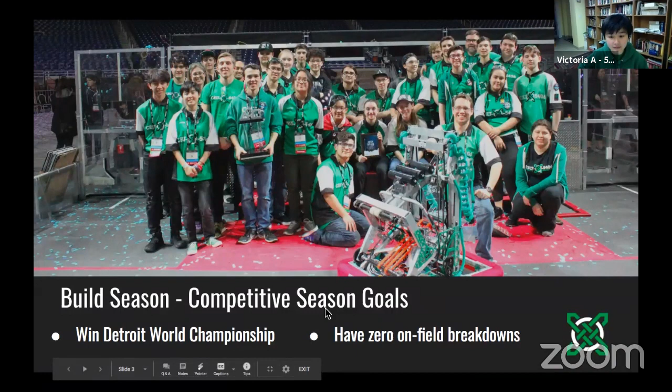Hi, I'm Emma. I'm in grade 11. I work on design and manufacturing, and I'm also the operator.

This year, our team had 2 main competition season goals. Every year, our goal is to be one step further than we did in the previous season. Last year, we actually had a goal to make it to Einstein's. Not a lot of people know this, but after Ontario District Champs, I decided that we were going to win Worlds, and nobody took me seriously until we almost made it there. Unfortunately, we didn't, but that became a goal this year. To field the most competitive robot we could, we also have a goal to have 0 on-field breakdowns. We do this by systems checks before every single match to make sure we don't miss anything and our robot is running as smoothly as possible.

Let's go on to the next slide. The workspace that we build out of is the Robodrome, which is a shared build space given to us by our board. It's outfitted with a full machine shop and a nearly full-size practice field. We worked closely with the school board to outfit the Robodrome and shape it into what it is today. We secured grant money and outfitted the machine shop with a bunch of complex machines, like a CNC mill, a router, a laser cutter, stuff like that.

Since this building is a shared board building, it serves as a workspace for the multiple FRC teams in our board. However, we invite teams from all across Ontario to come and practice with us and use our facility. All we ask of them is to bring us a team shirt, which we display on our t-shirt wall. As of now, we've collected over 20 t-shirts. That's just absolutely amazing.

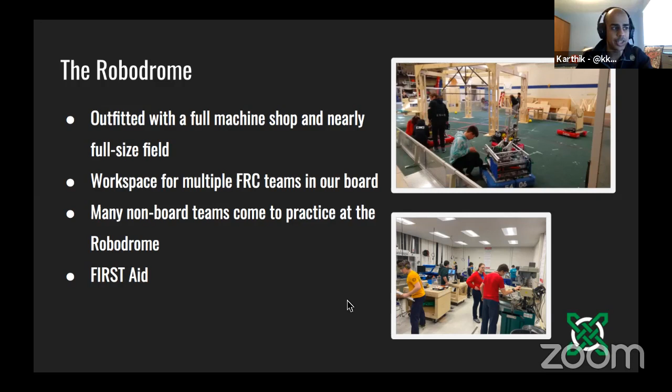Hello, I'm Andrew, also in grade 11. I do mostly mechanical and design.

Going into build season, our main strategy is to first figure out all the rules in depth about this year's game and how it can be played, in order for us to then try and figure out every single possible play or cycle the robot can perform during a match. Then we try to figure out how valuable that cycle or play could be based on how much time it takes, how many points it gets us, and how difficult it would possibly be to do.

And in order to do this, we also have a human game to make sure we understand it fully. We have 3 tiers of robots, and our teammates act as robots. We have the Brave Little Toaster, an average Ontario team, and a world championship winning team. And we figure out how they would affect their alliance scores and what kind of robots they would be and how they would play the game.

This year, we estimated an average game would be around 80 to 100 points, and we hoped by the end of the season we could contribute 150 to 200 points to our alliance.

Can we go to the next slide, please? So as a team, we do a lot of prototyping. We don't like to go from simply CAD to robot, that's it. We CAD a lot of our prototypes and we test them out, then we go back and CAD them until we finally come up with something that we feel is ready to build and will be good on the robot.

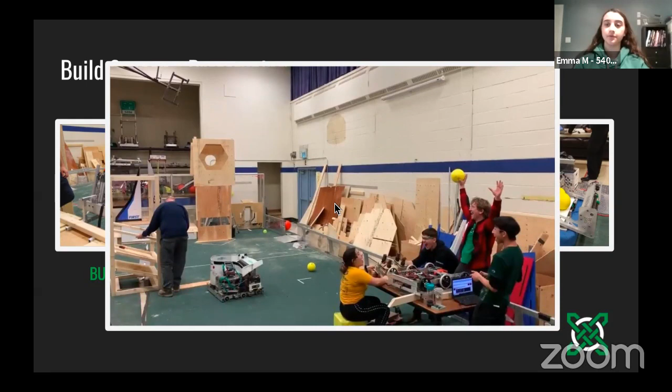So if we could play the video, this was on, I think, day 4. It was the first time we got a power cell in the inner port, and then by day 5 we were prototyping our hooded shooter.

So the last main thing, could we go one slide back, please? One of the last main things that we prototyped was mounting our shooter on top of a lifting mechanism in order for our short robot to be able to shoot over top of the control panel into the power port. After further design, we realized it was a bit too difficult for us to fully incorporate into our robot.

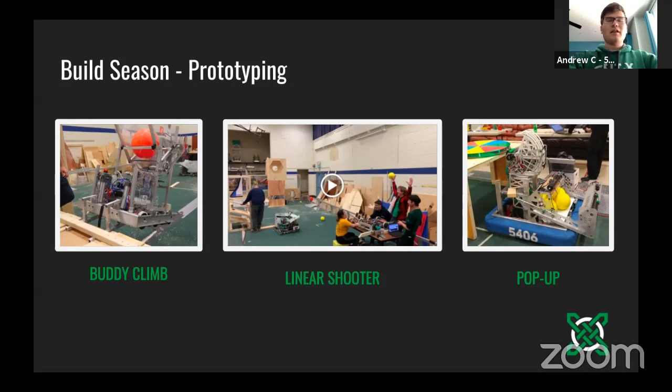It was also a bit heavy, and we did not have the weight for it. So we decided to go with a simpler option of just driving under the control panel a few more feet to get similar time shots.

So this is our reveal video for this season. We named our robot Mo because it looks like the microbe obliterator from WALL-E. And there's a little picture there. Show.

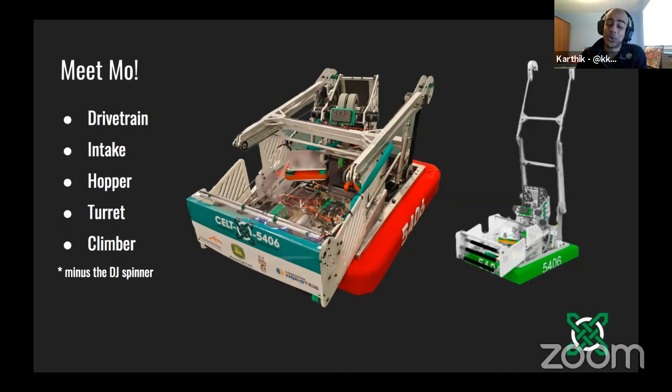Victoria, I wanted to share one comment we have from chat: I thought you named your robot after the superintendent from the HWCDSB, who's responsible for robotics and STEM. That comment is from none other than your superintendent, Morris. Thank you, I think it's a pretty good story, I think you should go with that one. Oh, man. Okay.

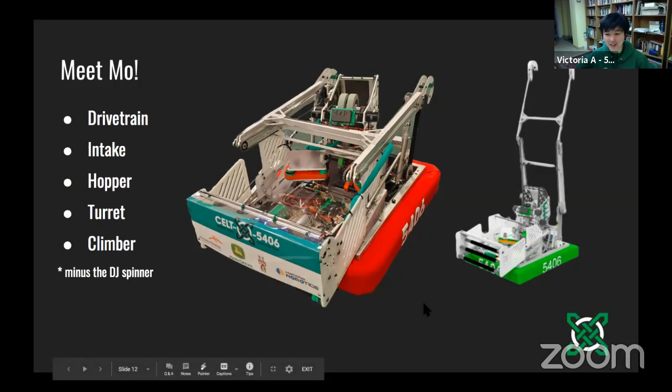Okay, so this year's drivetrain is a 6-wheel single-speed West Coast drive. It has four NEO custom gearboxes, and our gearboxes and rails were made on our CNC router.

So Danny demanded this year that we have base lock, since it's a shooting game. If you're not familiar with what base lock is: when you set the wheel PID to continually correct for the last position that you were in, so if you get knocked around a little bit, the wheels will continually try to correct to where the position you were last in. So basically the drivetrain is locked. This is useful for shooting and to combat defense — you don't want to get your shot messed up while getting defended. So base lock is just a way to combat that.

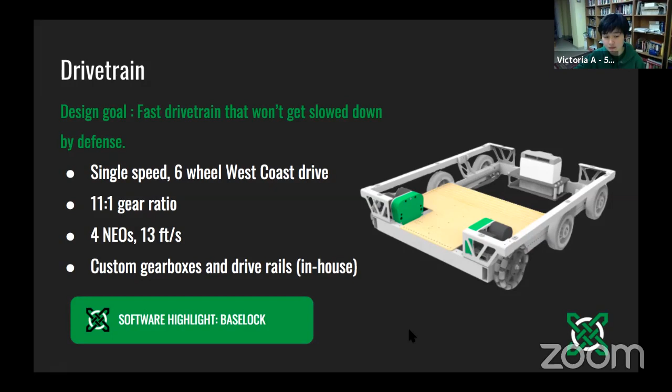Our goal when designing the intake was to make one that can efficiently pick up as many balls as it can in a short amount of time. What we came up with was a full width intake that can pick up 3 power cells at once. It is cut out of HDPE plates that were laser cut in-house and features custom 3D printed pulleys mounted on our rollers. Our intake also moves in and out using pneumatic cylinders and bearing sandwiches.

This allows our intake to extend out and intake from the loading station. So we pulse the rollers while we're shooting for two reasons. One, so the balls don't get jammed, they get to shuffle around a little bit. Second, our hopper is just gravity fed, slanted into the robot, but there's nothing actively pulling on the balls to push them deeper into the feeder and into the turret, so we need to pulse the rollers to push the balls back there.

I just wanted to mention a point brought up in the chat - it says this was the most redesigned part of the robot. Want to shed some light on why that was? For the most part, it was trying to make sure the power cells weren't getting jammed. A lot of the original designs had an issue of power cells jamming on the side parts of our intake where it leads into the hopper, as well as being able to efficiently get them through the hopper into our shooter. So we had to spend a good few weeks constantly redesigning and making minor changes to it.

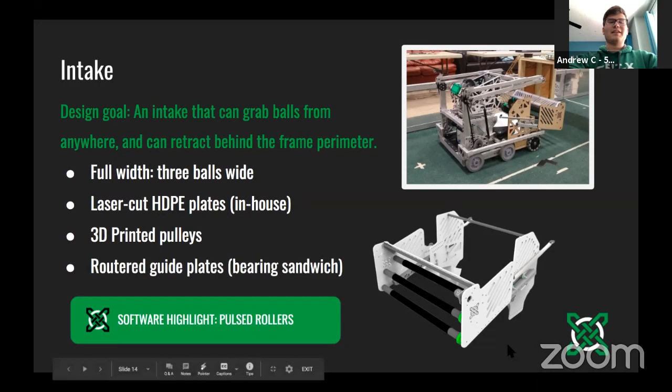At first, when designing our hopper, we decided to test out using brushes. After multiple attempts of trying to get them to work the way we wanted, they were slowing us down quite often, as well as sometimes the power cells would get jammed between the brushes. So we decided to remove them in our final design as we were able to run without them.

In order to avoid jamming power cells when feeding them to the turret, one side of our serializer actually spins 10 times faster than the other, so that one ball is pulled in at a time. Our feeder is actually two parts - a wheel that pulls the ball in from the serializer, and powered rollers to prevent jamming. It used to be a Lexan sheet, but the balls like to stick to the sheet and each other, so powered rollers just prevent them from doing that.

Our feeder is also velocity controlled. We don't pass the balls when the flywheel isn't spinning up or actively powered, because then it just jams. We also have a security mechanism where we limit how quickly the balls are passing through the turret, and it's velocity controlled, so it limits the max RPM rate.

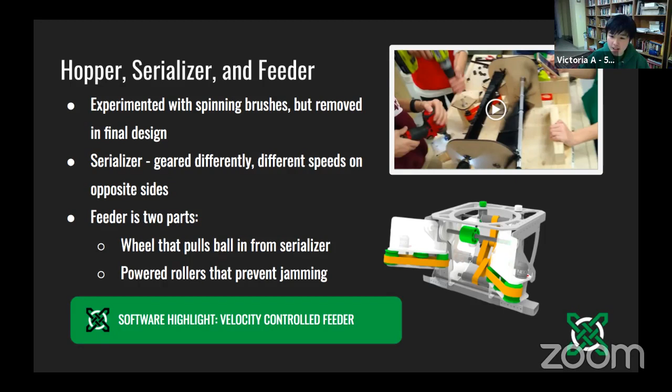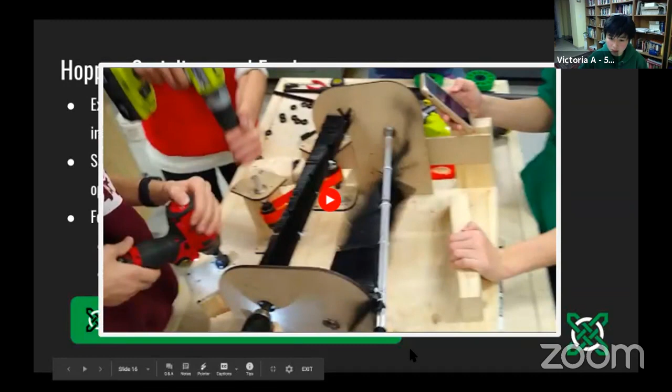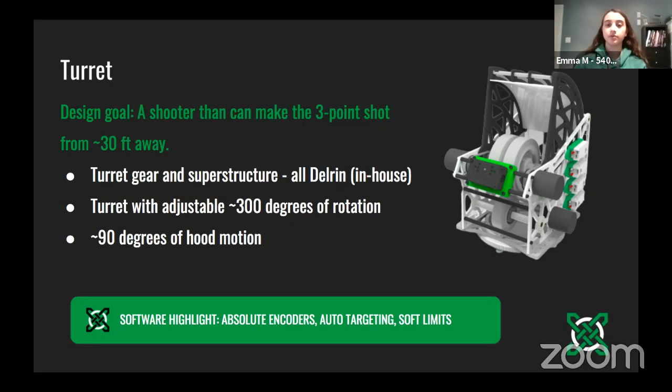So the cool thing about our turret is it's basically all made in-house. We have the delrin on the sides that's laser cut. The aluminum plates at the bottom are made on our CNC router, and we have the motor controller and limelight mounts that are 3D printed. We have about 300 degrees of rotation and about 90 degrees of hood motion.

The turret has the coolest software stuff by far, I think. We have two absolute encoders, one on the turret itself and one on the hood. So if we brown out or lose comms for a moment, we can always find our zeros, and we can find our zeros from any arbitrary location.

We also have auto targeting with the limelight. We have a quadratic regression, so we can find the hood angle and RPM of the flywheel from anywhere on the field using the TY value from the limelight.

We also installed soft limits. So we have about 300 degrees of rotation, but that's a conservative number, because we installed the soft limits to make sure we don't break our umbilical while turning the turret. It's worth noting we could actually turn 360 degrees if we wanted to - it's just a matter of extending our umbilical, because in our practice bot, we can turn 350 degrees. So that's something cool about that.

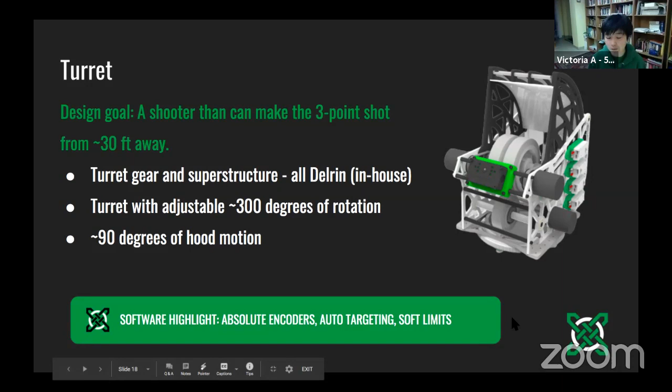Originally we had two individually powered linear bearing arms, but they didn't package well and were on the heavy side - they weren't working the way we wanted. So instead we have a virtual 4-bar linkage, actually powered by only one Neo because we ran out of motors on our robot, and it locks with a bicycle brake, which we took from our 2015 robot.

So we actually have an automated climb. Oh, do you want to play the video?

We have an automated climb where the driver just lines up to the switch and presses a button, and the arms go to an arbitrary height. Then the operator can adjust the arms and press another button, and we're climbing. That's our automated climb, but we also have a manual climb as a backup, to help achieve our goal of zero on-field breakdowns. It's good to have the manual option just in case the automated fails for some reason.

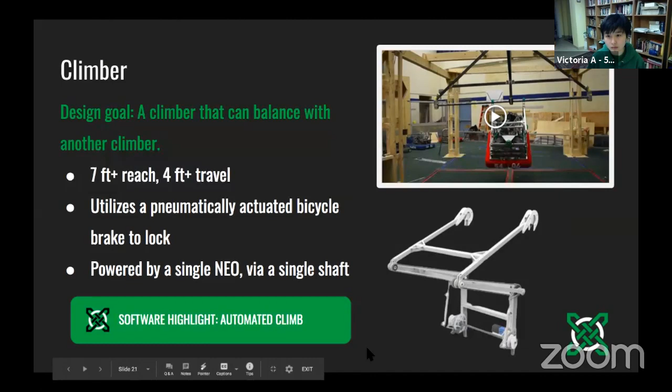So here are a bunch of electrical things we think are cool and want to highlight. In 2018 we stopped using Anderson connectors on our CAN because we used them out of spec, and that caused two different failures. One of them was our 2018 robot Tipsy throwing a cube over the driver station wall.

So we didn't want that to happen again, since there was a wire break in the Anderson connector in the umbilical. We switched to IDC connectors, which are in spec for CAN. Our umbilicals, we have two on our robot, one going up to the turret and one on our intake, and it's a nice way to keep all our cables together and organized. We also use DIN rail on our belly pan with custom 3D printed mounts that just clip on. It's really easy, so between matches, if something's broken, we can fix it right away.

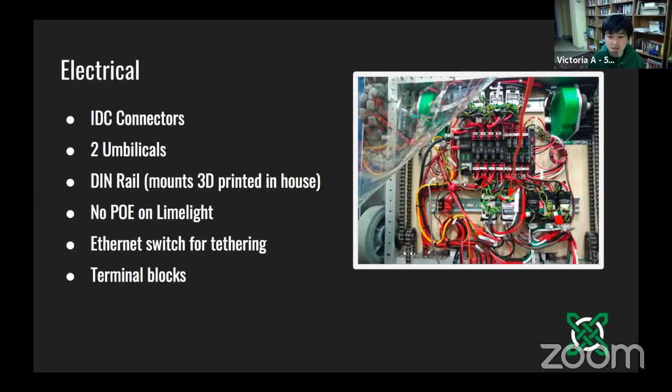We stopped using PoE on the Limelight because it introduced more points of failure. You could lose the Limelight if the Ethernet was just slightly off, so we found that wiring straight to the PDP was a better solution. We also have an Ethernet switch to further that zero on-field breakdowns goal, so nothing has to be unplugged when we tether on the practice field. And we used terminal blocks this year because 15 slots on our PDP were used by motor controllers, and we still needed to power the encoders and Limelight.

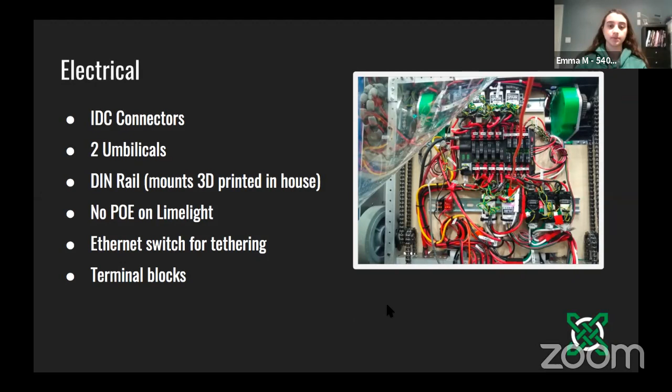So through the terminal block, you're able to power the Limelight and the encoders all together.

How's that set up? The encoders are on the terminal blocks, and the Limelight is in the PDP. And the terminal block goes to the VRM? I think it's wired straight to the PDP, though I could be wrong on that. But which slot on the PDP? The 16th one. So the Limelight and the terminal block are going to... I'm just trying to capture how you're getting all of that into the PDP. Is it all going into one slot, or? It's going into the terminal block, which goes into the PDP. So the Limelight's not going directly to the PDP, it's going to the terminal block. I'm pretty sure, yes. Okay, cool.

Our design goal for autonomous this year was a path following program that could get us a reliable 8-plus ball auto. In 2018, we had great path generation but terrible path following. In 2019, we had terrible path generation but great path following. So this year, when WPILib released the Ramsete controller for path following, we decided that was the best of everything and wanted to use it. We used the Ramsete controller for both path following and trajectory generation.

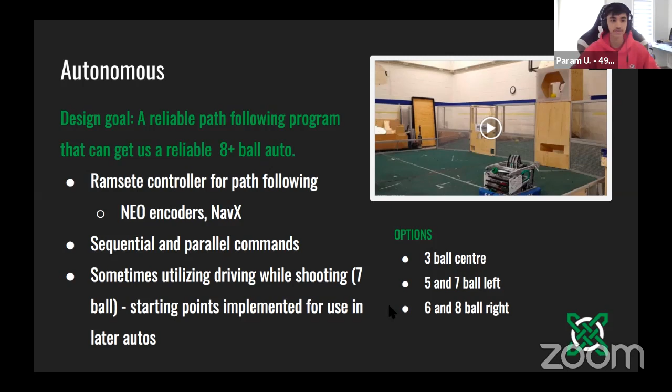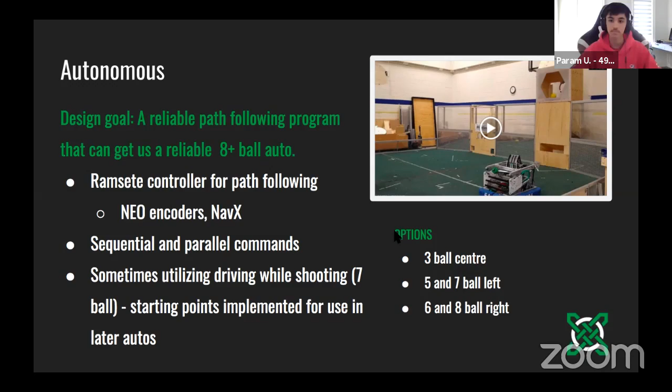And here we've got a question from the Twitch chat. Why did you decide to use Omni wheels if you already have a center drop from the West Coast drive? Does it help with the turning even more, or did you find that it wasn't enough to just have the drop? Yeah, it helped with the turning. The Omni wheels actually got quite destroyed on the rendezvous point, but it was very helpful for controlling how we turned, especially when there was a lot of power cells on the field and we only wanted to be picking up 5. So we found it was better for control.

How much drop did you have this year? An eighth of an inch. Okay, cool.

How was your hood actuated? Was it just pneumatically, just 2-position, or was it fully adjustable? It was fully adjustable. It was gears custom cut on our laser.

Cool, that's just a fabulous robot. Just another one of these robots that we see on the show where it's just like, man, I really wish I got to see it play. And I hope we will have that opportunity at some point. Hope the world is more under control and we can get back to playing robots, because that would be amazing. This is one of those ones that I just really, really want to see on the field.

Yeah, for you, Celt-X, what was that feeling like when you found out that the season wasn't going to happen?

It was definitely upsetting. I was looking forward to competing. I know it's kind of out of our hands. I just hope that we eventually get to end up playing with the robot.

And are any of you seniors, or grade 12s rather? We're all in grade 11. So you're all back for another one. Yeah.

All right, before we go, is there any last thing you want to tell us about your robot, about your team? Any shout outs you want to give? Thank you, Mr. Hootzel, for watching. Yes, let's go, Mr. Superintendent.

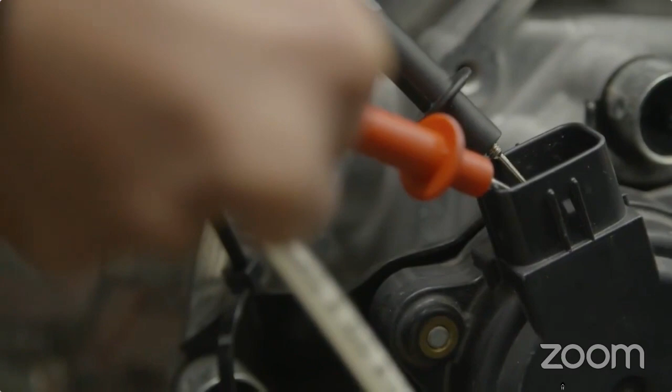All right, we are back for another segment. Param, you ready to do this? Oh yeah, ready as I'll ever be.

Let's go. Have you met our next guest for story time? I have met our next guest online and over brief meetings and various events, but I'm very excited to get to do this as an interview, as a story time segment. All right, well, let's bring her out. We've got FIRST alum and FIRST MC and game announcer, drive coach and lead mentor for Team 1923, Libby Kamen. Hey, Libby. Hey guys, thank you so much for having me on FIRST Canada Live. I'm really excited to share today with you guys. We're super pumped to have you on the show to tell stories, just to find out all about what you do, what you've been doing in FIRST, for someone who's probably been in FIRST for a longer percentage of her life than anyone else, because you've basically been there since the beginning.

I don't remember some of those very early beginning years, but I'm told I was there. I'm told I picked up Maize Craze corn and wanted to play with it, so I guess that counts as field reset volunteer, back in '92, as you do.

But no, I've been in the FIRST community my entire life, and it's done a lot of shaping of who I am. It's something I'm very grateful for and glad to share with you guys today. Well, we're excited that you're here. So please tell us this story from the very beginning, when you're picking up Maize Craze corn, to everything in between and where you are now, Libby.

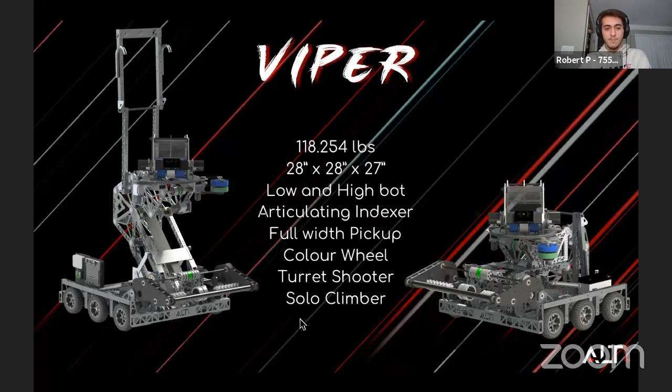And this is our robot this year, Viper. We're 118.254 pounds. In our down position, we're 28 by 28 by 27. And our robot this year is kind of a low and a high bot. So you can see here, it moves itself from a low position that fits under the trench to a high one that can shoot over defense and shoot over the color wheel. This is accomplished through the articulating indexer, which is fed by a full width intake. We also have a color wheel mechanism, a turreted shooter, and a solo climber.

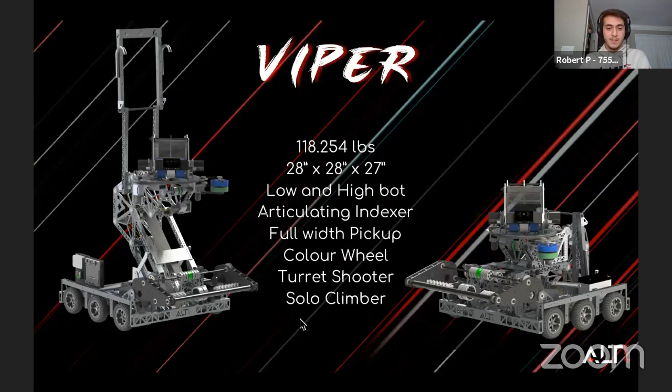We could go on to the next slide, yeah. I have lots of questions, but I want to let you finish before I even get to them. Sure, I'm sure you're going to answer them. Right away, that design inspires a lot, let's just say. So just a quick note on all the slides, those are CAD renderings. The whole robot was done in SolidWorks, who's one of our sponsors as well. So we'll get into the strategic design priorities, I guess.

So right at the beginning, we knew hang was a top priority. So we were always looking for a way to incorporate that with the rest of the robot. We'll get into more about why we chose to integrate that with the 4-bar that you see in the picture later on. We wanted to get inner port shots from the trench so that we wouldn't get played defense, touch ground pickup, that's super fast. And this was the thing right at the get-go. We saw it was important to have to fit under the trench. So obviously be below 28 inches.

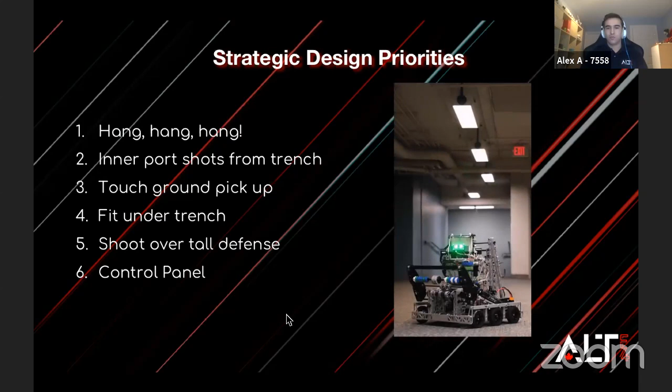And another priority we had was to shoot over tall defense, because even if you're still in the trench, you could still be getting defended by another bot, which would interrupt the view from the limelight or something like that. So we wanted to be, we see that's the advantage of being a high bot, but with a low bot, you can have much faster cycle time by going under the trench. And we wanted to do the color wheel too. We can go to the next slide.

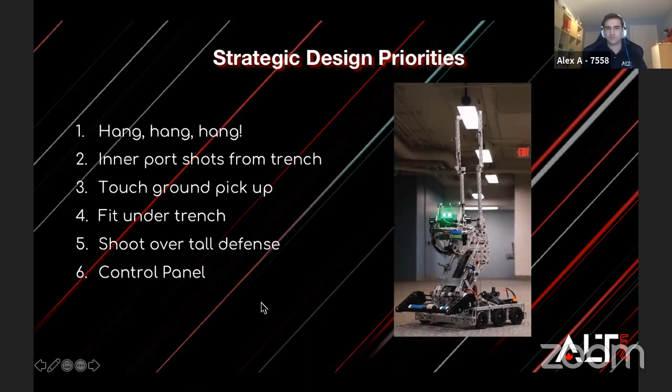Before we get into the prototypes, I want to address the elephant in the room. A lot of the videos are going to be vertical, because our social media influencer mentor, Noeen, was there for a lot of the taking of these, so that's why you're seeing this fun aspect ratio. I'm just going to go through the prototypes we had briefly.

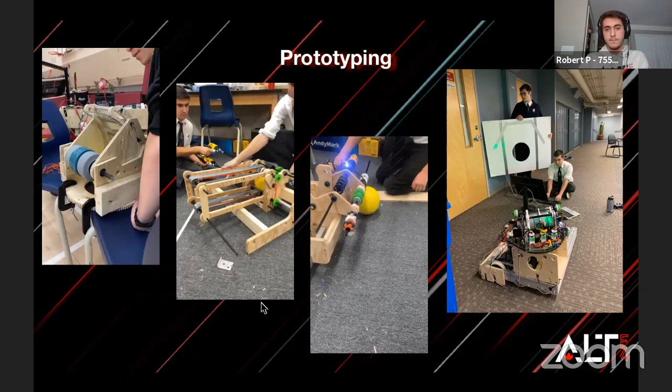Our drivetrain is a West Coast drive with custom box tubing. We have gearboxes which are 2-speed shifters, allowing for 9 feet and 18 feet per second. Our drop center is pretty small, the drop is only 1/16 of an inch. We found initially this was a pretty big issue; we were running 4 Falcons, so when trying to do turns, the Falcons would produce their high-pitched noise from stalling and trigger their own current limiting system. But over time, once the tires wore out, it wasn't an issue anymore. So the 1/16-inch drop ended up being a real advantage because it gave us a lot of grip throughout the whole match.

Were you running into those current limits in low gear as well, or just high gear?

In low gear as well. Even the 9 feet per second was pretty fast. At some point we were considering changing the gearbox to something like 6 feet and 10 feet per second, but we figured we didn't really have time for that.

Let's just wait and see if they wore, and we got lucky they did. So, did you keep the air pressure the same in the outer wheels as the center wheel?

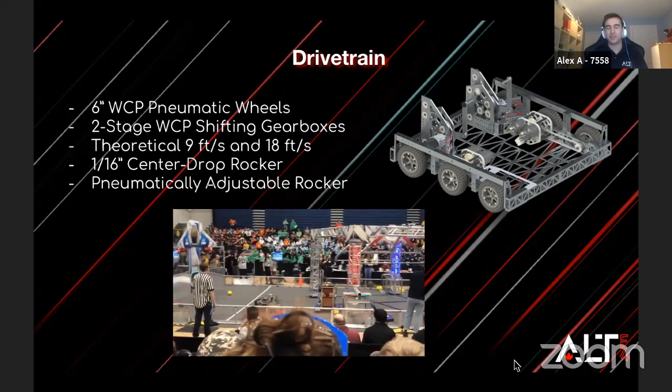No. It says pneumatically adjustable rocker there. I thought we were going to get rid of that, but I guess not. So that means we inflate the middle tire more than the outer two tires, so the rocker increases a little bit more than 1/16-inch, but it's not that noticeable.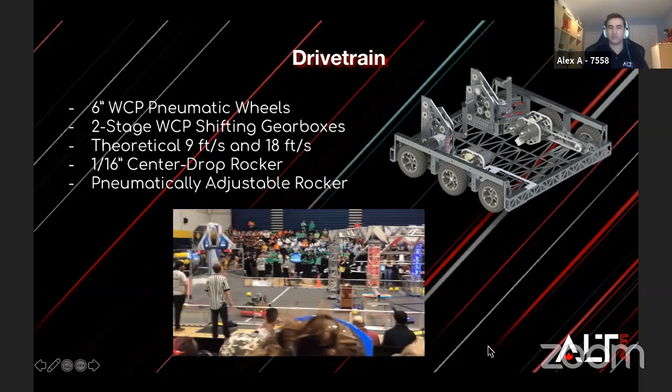Just a quick note on the design: you can see we have the belly pan, which is cut out of eighth-inch aluminum. At the front, those two big supports hold the 4-bar, and it's like a superstructure built into the drivetrain, so it's a super strong base. You'll see how that works later. That structure actually holds the motors for both the 4-bar actuating and the main conveyor belt inside the 4-bar that drives the motors. So that's where they're mounted, and the gearboxes are all custom hidden inside the pieces. We can go to the next slide.

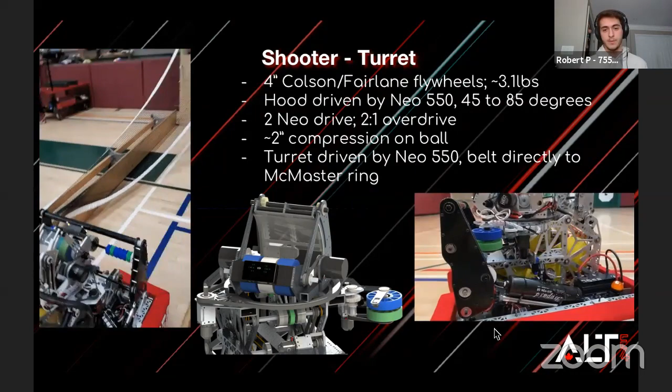All right, so this is our shooter and turret. We use 4-inch Colson and Fairlane wheels, which gives us a weight of about 3 pounds across the axle. The hood is driven by a Neo 550, which gives us about 45 to 85 degrees of range of motion.

The flywheels are driven by 2 Neos, about a 2-to-1 overdrive, and there's about a 2-inch compression across the ball. That gives us 2 inches of compression between the back plate and normal to the wheels. Because we're using a plate and not 2 kind of bars, we have more consistent compression. We actually found that gave us a more consistent shot versus having 2 limbs that extend up and down.

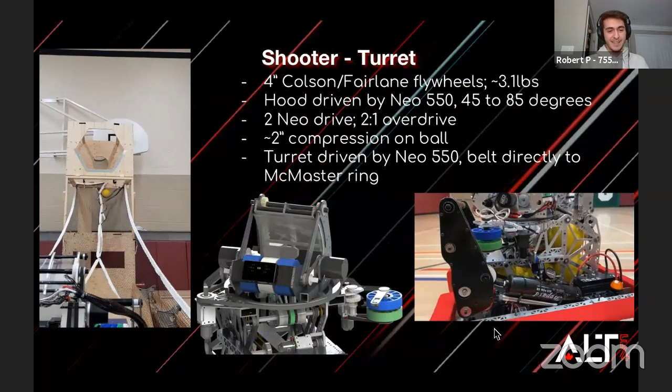Can I just say, I'm really impressed by your ball return system with the net right there. That's something we did, us the programmers, the day we found the competition was canceled. We wanted to just keep cycling our shot. That's a classic programmer move, by the way. It's like, yeah, I don't want to get up to pick the balls up. So we can just set up the benches and loop. Yeah, we just left him alone for 15 minutes and we came back and this is what we found. Rule number one, never leave the programmers alone.

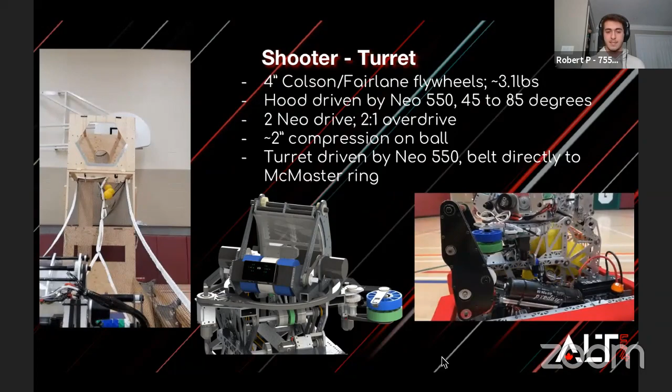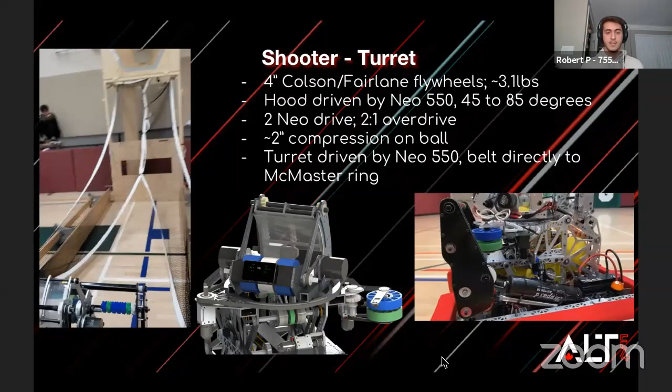Of course. Yeah, our turret is also driven by a Neo 550. Something we found that not a lot of teams do, but we had pretty good success with, was we only had a friction connection between the belt and the turret ring—there weren't any pins or anything connecting the turret belt to the ring. It was just the tension we put on the motor against the plate that gave friction between the belt and the turret ring, and we found that was enough to drive it. Even if it did slip, we were able to adjust for that in programming by always adjusting turret position based on limelight values. We got this idea from team 610—we found they were doing it too and had success with it, so thanks to them.

The advantage of doing a 4-bar is that we get 20 inches of vertical movement, which means we can use our 4-bar to hang, and we can use it to do the color wheel. This minimizes the weight of the robot because we don't need separate subsystems to do the different aspects of the game.

So the 4-bar itself is held by 2 pivot points at the front, which attach to the superstructure we saw in the drivetrain. It's driven by 2 Neos geared down about 130-to-1, but it also has surgical tubing to neutralize it so that we really only use the power of the Neos during the hang. Throughout the match when we're going up and down, most of the force comes from the surgical tubing.

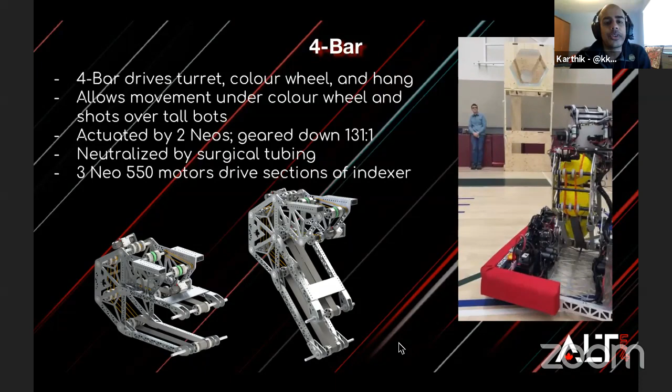But there were many times during the Humber tournament where we're stuck in the trench and we're like, oh my God, if we had just finished this 1 or 2 days earlier, we could just lift the 4-bar and shoot right above the defense. At least that's validating - when you don't have a feature and you really want it, that's when you know okay, this would have been useful. So it kind of validated that the idea was good, and at the next competition, if it happens, we'll definitely start using it.

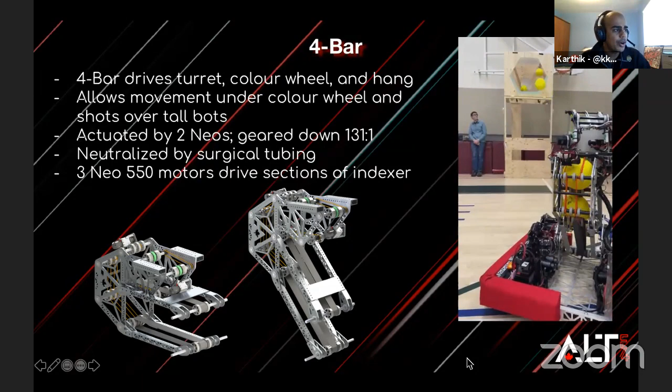Another question in the chat about the 4-bar: does the position of the 4-bar impact feeding balls around the curve into the shooter?

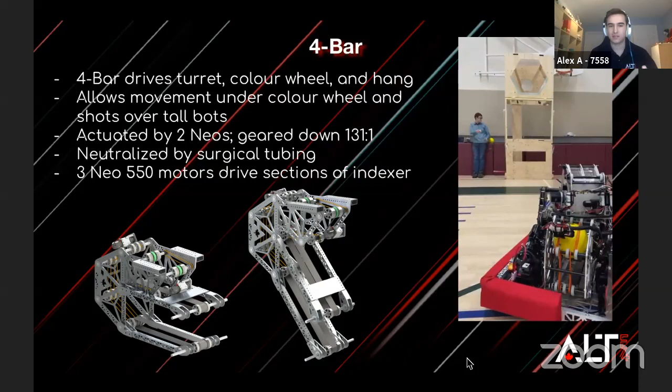Not at all. That curve at the back is a fixed frame - one solid piece of quarter-inch aluminum. The only part that changes shape is the first piece with the duct tape belt. Everything past that, the U shape and then the feeder into the turret, doesn't change shape at all as we're moving up and down, and that's where most of the balls are stored anyway. So there's really no difference between shooting high and shooting low.

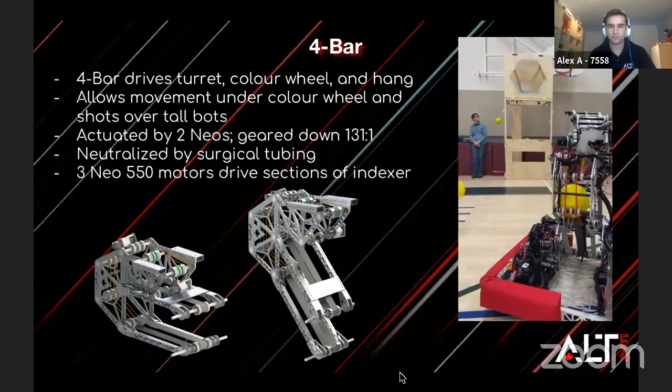So we can go to the next slide. Yeah.

The next slide is for our intake. This is something we actually tested a few different things with. At first, when we tested the robot, we had 4-inch Mecanum wheels hung off the front of the robot and tried to let those center. Unfortunately, we found those weren't quite fast enough to give us the touch pickup we wanted. So we looked around at our prototypes and also talked a lot with 188, who ended up with a really similar intake. We found that these 2-inch Mecanum wheels with a 16th-inch space actually gave us the fastest results possible and really good touch pickup.

You can see in the video on the bottom right, that's just Sony throwing a ball into the intake, and it catches it, holds onto it, and centers it really fast. None of these videos are sped up - that video is not sped up, that's just how it caught it.

We found that this geometry gave us the best results for our touch pickup, which was the biggest thing we were looking for. We have 3 axles: one on the front holds a roller, just the 1.125-inch Vex roller. Behind that is an axle with the Mecanum wheels, and two compliant wheels in the center. On the third axle, we have 2-inch compliant wheels that keep the ball from popping out of the intake, which was a problem we had a lot with early prototypes, where the ball would just jump out as we were intaking it.

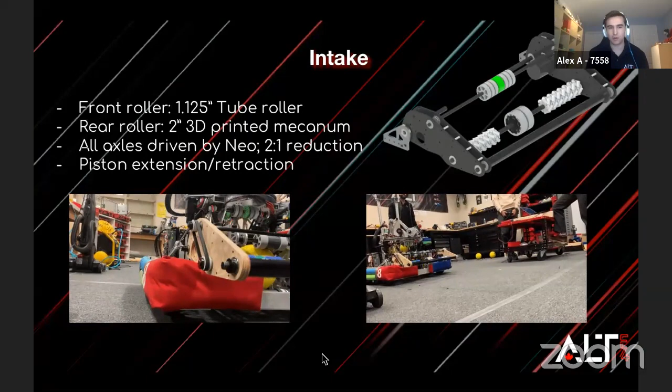Quick note on bumper material: some teams were talking about using a slick nylon material, but we found during testing that putting nylon on one side of the robot and normal fabric bumper material on the other side, then testing picking up consecutive balls really fast, the nylon was actually too slippery. People wanted to use it so you don't run over the ball, but with the nylon, the ball would stick around and get rolled with the intake. In the end, the normal fabric was more beneficial, so we made all our bumpers out of normal material since that gave us better results.

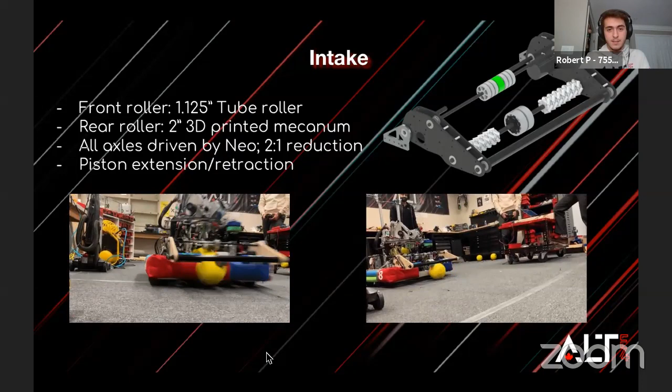Another problem other teams were having was running over the balls, which we didn't really have trouble with. That's due to our low center of mass with very limited shaking, which is kind of why we went with that design.

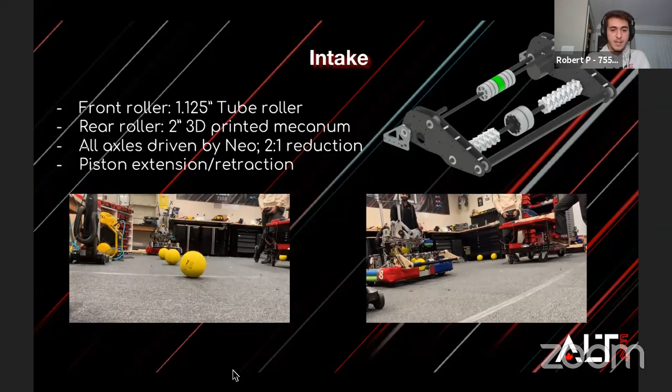On the intake, all the axles run together, bolted on a 2-to-1 reduction straight from a Neo. That speed gave us the really fast touch pickup we were looking for, and of course it's piston extended and retracted. You can see in a few other videos the intake going up and down.

We're kind of low on time. Just to cover the hang really quickly, it's a really light mechanism, about 5 pounds total, and we just put it on the back of our 4-bar.

One servo motor releases a steel wire, which causes a 2-part system, as you can see in the video. First, a folding part extends, and once that unfolds, constant force springs bring up the linear part. Then we just hook on with the hooks and pull the 4-bar off, and that's it.

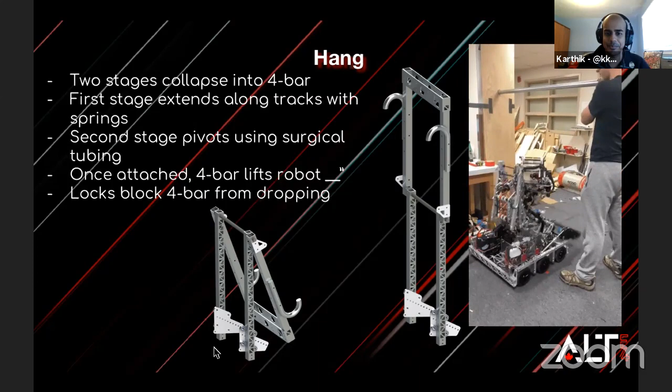Is that dude just holding the bar up that's holding up the robot? Yeah, Robert, is that you? Yes. We didn't really have a big setup to hang on, so we put a piece of plywood in the hole and held the bot up. Can I say your programmers had a really smart solution for the ball return, and your mechanical people had a less smart solution for hanging? That'd be a good statement. Alright, let's keep going.

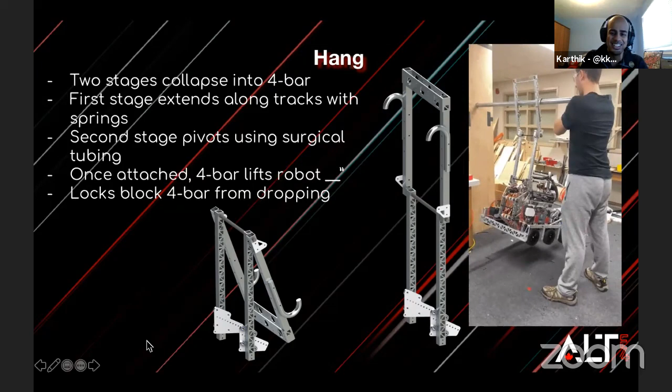Let's go to the next slide. Okay, so really quickly on the programming: for the shooter, we use the Limelight. Initially we were using a Raspberry Pi and got it working, but had some connection reliability issues. So we switched to the Limelight, which was super simple, took 10 minutes to integrate with the software, and that was it.

The turret itself runs a PID loop. A lot of people use the PID loop from the Limelight, which runs at 90 Hertz, but to control the PID we're actually using the encoder on the Neo 550, which runs the belt. This has 2 advantages: it runs at a faster cycle time, so we can use the higher resolution image from the Limelight at 30 frames per second, and we compensate in code using the robot's motion and odometry, giving higher resolution, more accurate 3D pose estimation. Running the PID on the encoder lets the turret track while we're moving.

The turret belt is just held on with friction, there are no actual teeth, so if there is slippage, it doesn't actually matter.

It doesn't affect us because we're always measuring relative to the current turret position. We have a magnetic zero—a magnetic limit switch that zeros when it hits a certain position so that we know where the turret is at all times on the field. And we use the gyro as well during auto.

The hood is continuously variable. We noticed some teams like 2056 did a 2-position hood, but we decided to make it continuously variable because we want to consistently get 3-point shots, even while being played defense. For example, at Humber, there were times we were close to the trench initiation line shooting 3s, and another bot would push us forward a bit. But since the hood can make very fine adjustments, it accounts for that.

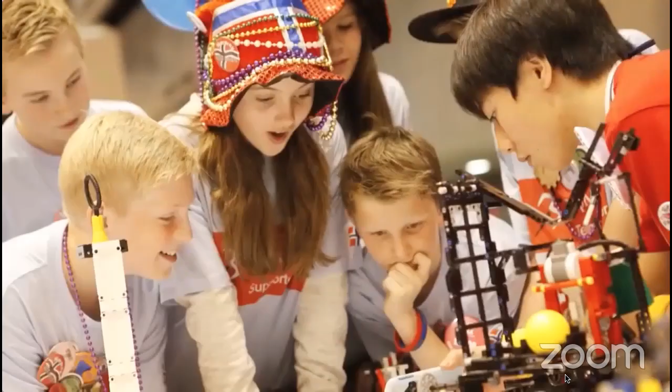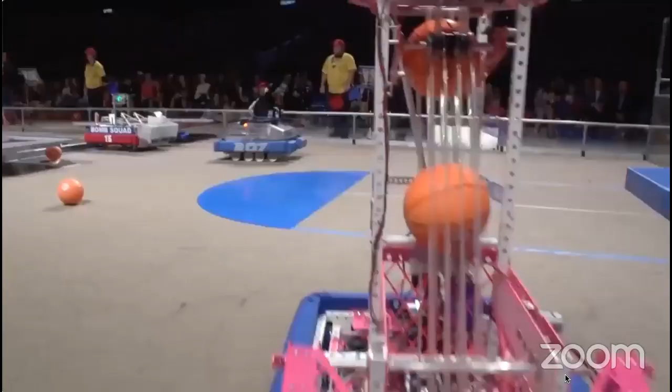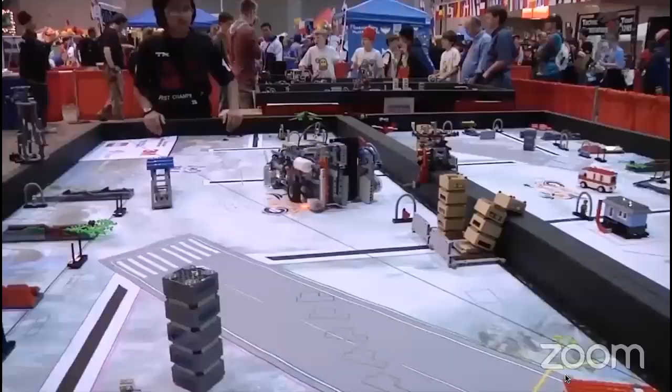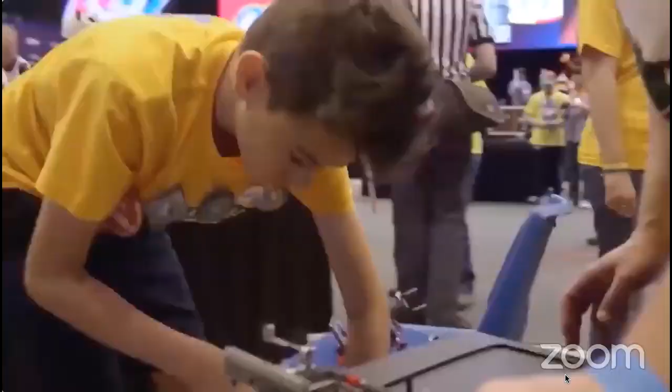First LEGO League is a fun, exciting, mentor-based experiential STEM program for kids ages 9 to 16. It's an alliance between FIRST, an international organization to inspire young people founded by Dean Kamen, and the LEGO Group. It's one in a progression of four FIRST programs designed to foster 21st century life skills and spark kids' interest in science, technology, engineering, and math, so they become innovative problem solvers able to tackle the world's biggest challenges. Each year, FIRST LEGO League teams are presented with a real-world theme, like transportation or waste management. Over a minimum 8-week season, they select and research a problem based on the topic, then devise innovative ways to help solve that problem. Teams also build and program a LEGO Mindstorms robot to solve a series of robot game missions, all while practicing the signature core values, which emphasize good sportsmanship and having fun. If you'd like to get involved with First LEGO League in your area, visit us online.

All right, we're back, and that video is appropriately timed because we're here for another program showcase, and our program showcase today is on First LEGO League. And to lead this segment, we've got a lot of people on this segment.

We've got two leaders on it. We have Annika Pitt, First Canada Program Coordinator, and Dave Ellis, the First Canada Director for both the First Tech Challenge and First LEGO League. Hey, how are you two doing? How you guys doing? Good, good. How are you? I'm doing fabulous.

Annika, you've got the maze craze behind you. Yeah, I was inspired by your earlier conversation about that competition, and we've been talking about it on a couple of different broadcasts, so bringing it out today.

All right, so what do you have in store for us today about First LEGO League? Well, we have a great panel of people on the call today. If they want to show their faces, we'll get started with them. So we got Jacqueline and Shanika, and we got Thuvashan and Sean. And the six of us are going to walk through what First LEGO League is about.

And we wanted to really, because of the audience being mostly FRC students, focus on the idea of how FLL relates to FRC, and what that looks like for them. What's the experience like, and what things do they take from the FLL experience into an FRC team? So I'll just bring up our slides here.

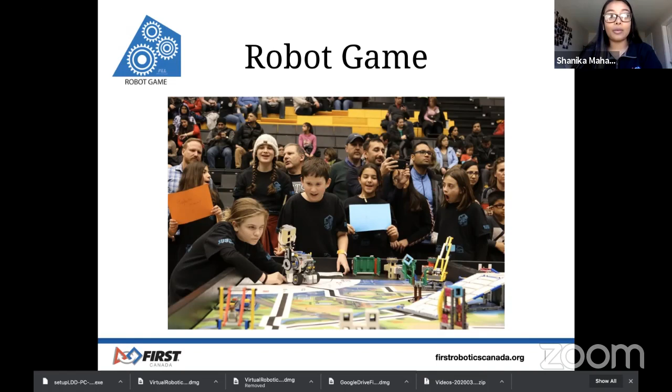So you can go on to the next slide.

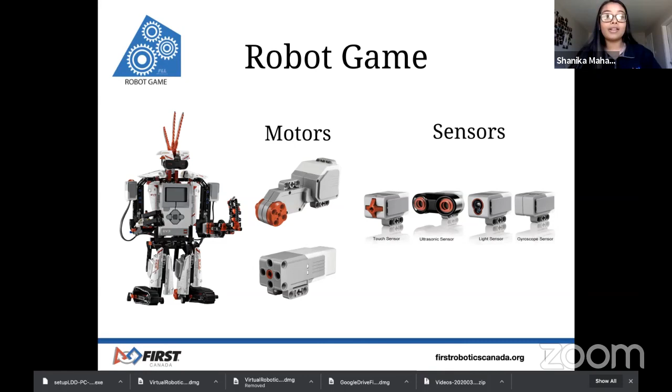So just an overview, as Annika talked about, of some of the materials that you would need. The EV3, and then each robot is allowed up to 4 motors, as we have listed there, and up to as many sensors as they want. There's touch sensors, ultrasonic sensors, light, and gyroscopic sensors. So teams do different strategies and have different approaches to what mission models they want to build or what attachments they want to build to accomplish their mission.

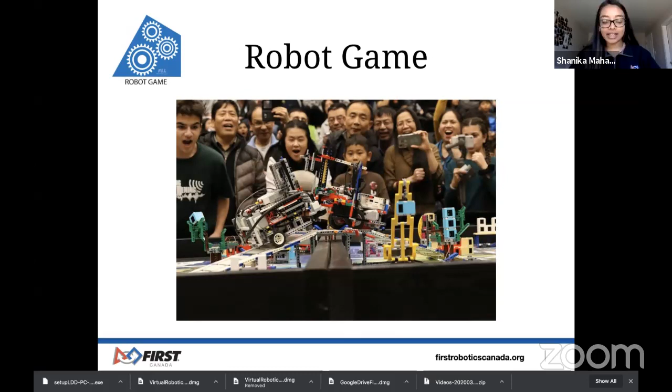And the next slide is actually a video from Animal Allies. So a couple years ago, Connor Bosey was one of the drivers on the team. This is at Worlds, and they accomplished a ton of different challenges. So we're just going to play that for the minute and a half there.

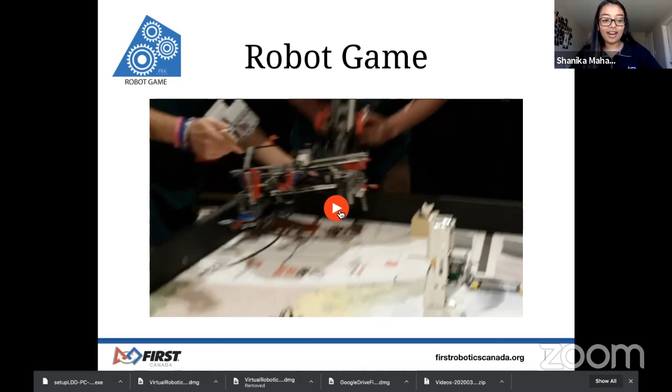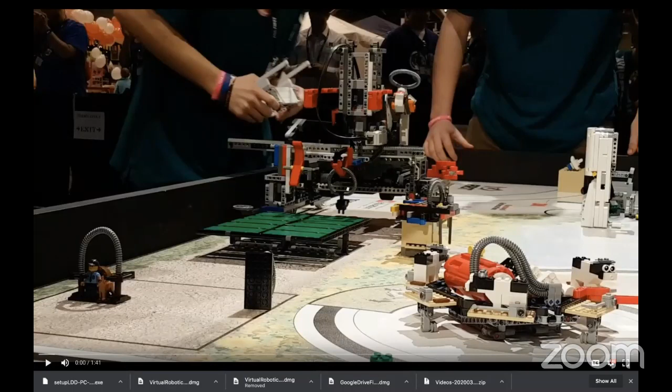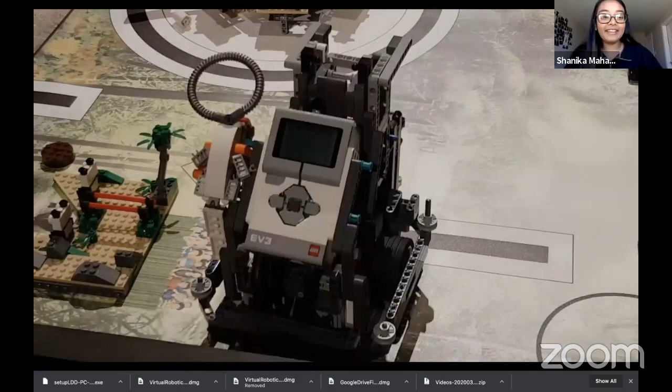And I think it's really important for our FRC audience to understand, this is autonomous. This is not drivers, completely. Yeah, for sure. And it's just kind of overwhelming, like look at the complexity of this robot and everything that it can do.

And it's so exciting because sometimes you'll see robots with hydraulics on there, and these kids who are like 9 years old are explaining to me how this works. I'm not in engineering at all, so I have no idea how this stuff works, but they can explain this and the programming to you, and it's incredible to see what kind of imagination goes on in these kids' minds. They're capable of so much, right?

Right, and the precision and the repeatability, because anyone who's worked on an FLL field knows there's a lot of variability there, and these robots can just consistently, time after time, pull off these missions so accurately.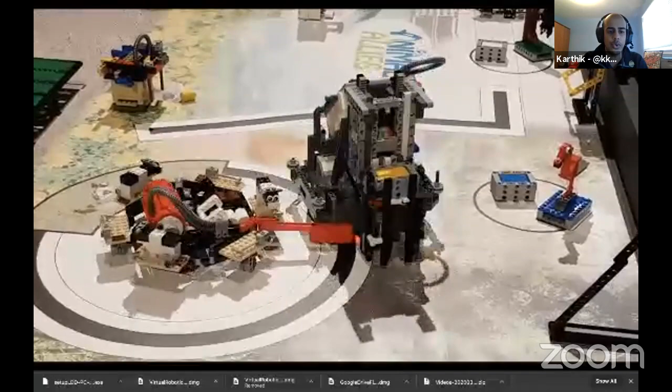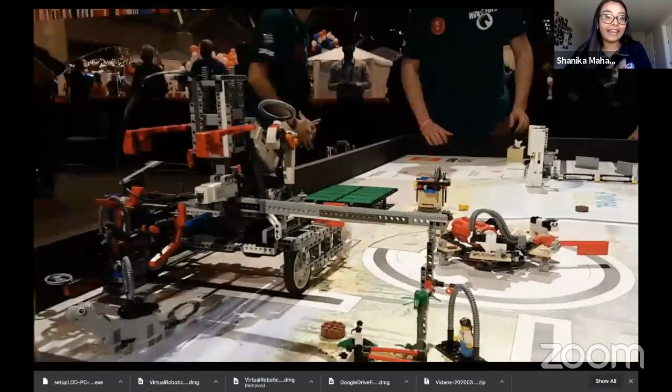And if you look at the level of precision, especially in one of these missions, if you didn't hit that lever and the robot didn't go at a certain pace or stop at a certain point, the mission was done, right? A lot of these are made to be really finicky and require that level of precision, which I think transfers really well to FRC, right?

It transfers ridiculously well because you do typically need that level of precision in FRC, and your autonomous mode's only running for 15 seconds. Right, exactly, and then 2.5 minutes of driver control. And again, I can speak from a driver's experience, fastest 2.5 minutes of your life, super duper cool, but just seeing how much your robot can accomplish.

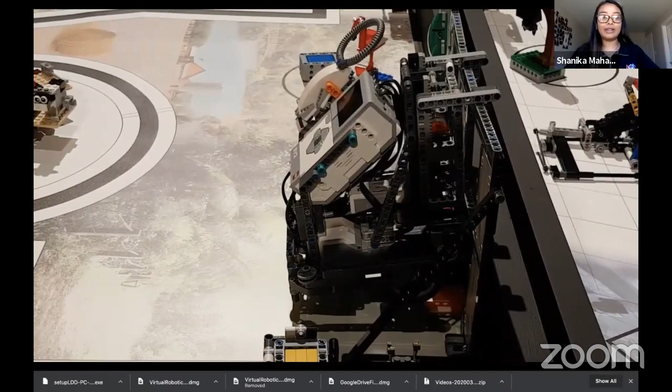And this is one of my favorite challenges near the end - the entire point was that you could hang on the wall, acting like a lizard, right? So mimicking the animal's abilities just with your robot.